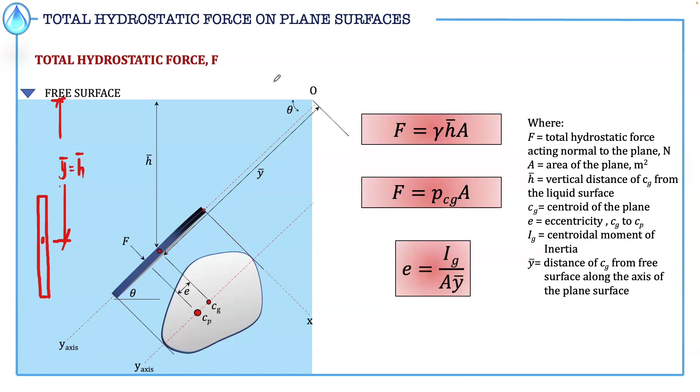Okay, so with that, let's solve sample problems.

Sample problem number 1: A vertical rectangular plate, 1 meter wide and 3 meters high, is submerged in water with its top edge at the water surface. Find the total hydrostatic force acting on one side of the plate and its location from the bottom.

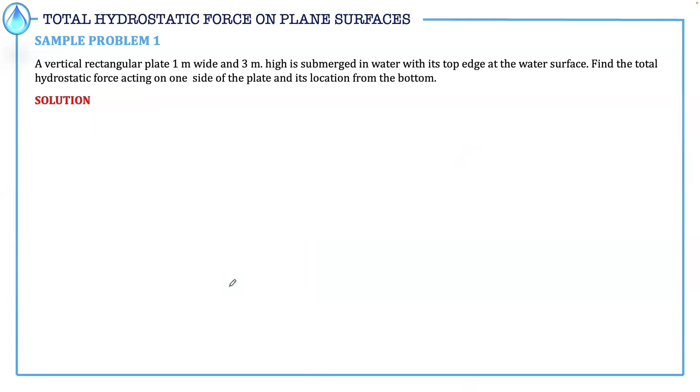From the statement of the problem, we have a plate submerged into water, with a cross-section of 3 meters in height and 1 meter in width. This is the 3D view, and if we draw it in 2 dimensions, this will be the plan view. The liquid surface is located at the top of the submerged rectangular plate, with height 3 meters by 1 meter.

For this plate, let's solve for the hydrostatic force and determine its location from the bottom. Total hydrostatic force is F, and we can use the equation gamma H bar A to compute for the total hydrostatic force.

Gamma is the unit weight of water, which is 9.81 kilonewton per cubic meter. H bar is the location of the center of gravity up to the liquid surface.

The liquid surface is placed at the top of the plate, so H bar will just be equal to half the height of the rectangular plate, which is 1.5 meters. Again, H bar is the distance of center of gravity up to the liquid surface, so CG or H bar equals 1.5 meters, just half of the rectangular plate height.

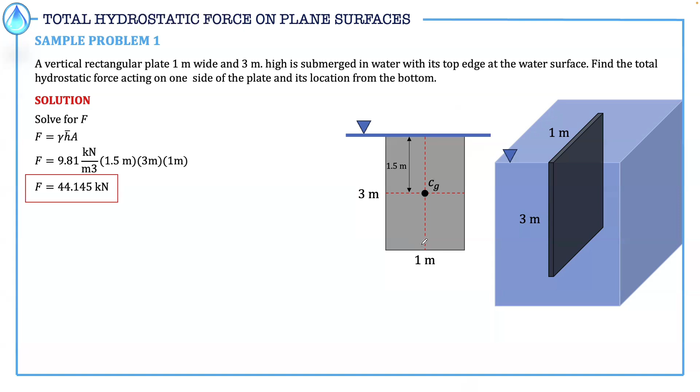Next, let's solve for the location of the hydrostatic force from the bottom of the plate. As discussed earlier, the hydrostatic force directly acts on the center of pressure of the plate, which is located below the center of gravity.

We know its vertical distance, and that distance is always E, the eccentricity. So again, what is being asked is the location of the center of pressure, or where the hydrostatic force hits towards the bottom of the plate. Let's call that the X distance.

We can get the relationship that X distance is equal to the total height of the plate minus 1.5 minus the eccentricity. That's directly X. But we don't know E yet, so let's solve for the eccentricity first.

Eccentricity can be calculated using the equation IG over A y bar. IG is the centroidal moment of inertia for the plate. If the plate is rectangular, the centroidal moment of inertia is BH cube over 12. For area, we know it's 3 times 1, base times height. For y bar, since the orientation of the plate is vertical, this will be equivalent to h bar.

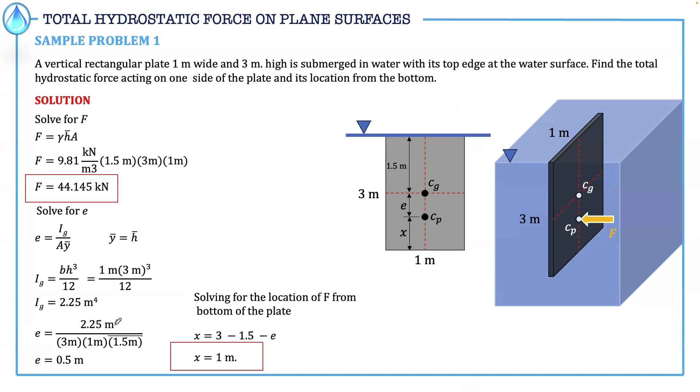Next, let's have sample problem number 2. A vertical triangular surface of height 3.5 meters and horizontal base of 1.5 meters is submerged in oil with its vertex at the liquid surface. Determine the total force F acting on one side and its location from the center of gravity of the gate.

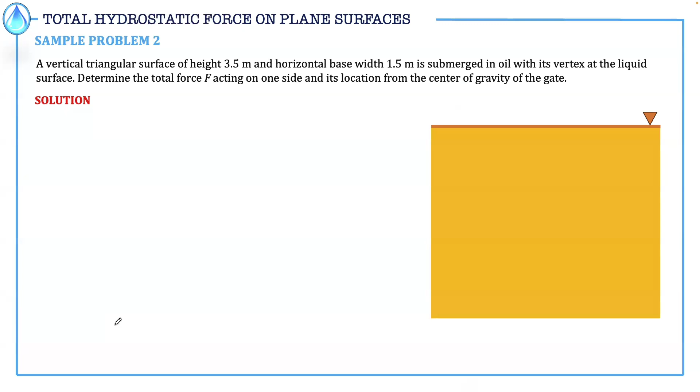So now we have oil as our liquid, and submerged in it is a triangular plate wherein the vertex is located at the top of the liquid surface. It's at the liquid surface. Its height is 3.5 meters, and the width is 1.5 meters. So again, two things are being asked: the hydrostatic force F, and the location from the center of gravity of the gate.

The total hydrostatic force can be computed by the equation gamma H bar A. Gamma would be the unit weight of the liquid in which the gate is submerged—in this case, oil. When the problem states oil as the liquid but doesn't give the specific gravity, we will use the default SG for oil, which is 0.8.

Yan, 0.8. Next, H bar location, or the vertical distance from the center of gravity up to the liquid surface. If triangular ang cross-section natin, 2/3 lang ito ng height papunta sa vertex. Pero kung pupunta siya sa base, 1/3 ng height yon.

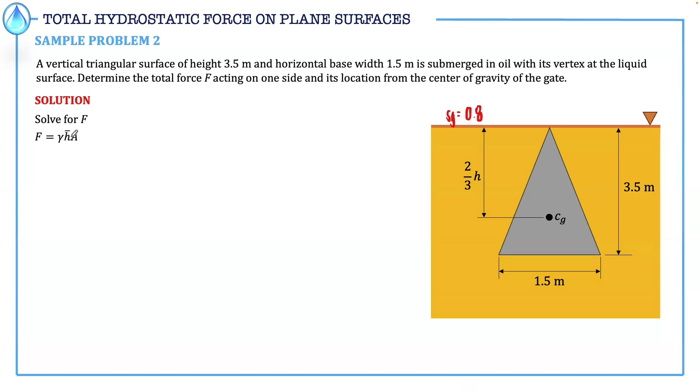So for this orientation, vertical distance for H bar, CG to the liquid surface, ay 2/3 ng height, wherein height is 3.5 meters. Area ng triangle ay 1/2 base times height. Let's substitute: unit weight, 9.81 times 0.8 kilonewton per cubic meter, times 2/3 ng height 3.5 meters. Area, 1/2 times 1.5 times 3.5.

So let's simplify. F is equal to 48.069 kilonewton. The cubic meter in the unit will be cancelled, matitira na lang yung kilonewton.

Next, let's solve the location of the total hydrostatic force from the center of gravity. Acting yung force F sa CP, and ang CP ay makikita at E distance below the center of gravity. So hinahanap natin yung location ng hydrostatic force from the center of gravity, meaning it's just E, the eccentricity. So solve natin ang eccentricity.

Eccentricity is IG over A times Y bar. Since vertical naman yung triangular gate natin, Y bar will be equivalent to H bar. For the centroidal moment of inertia ng triangle, ang centroidal moment of inertia natin ay BH cube over 36. Base will be the horizontal dimension, and yung H naman yung nakatayong dimension natin, height of the triangle.

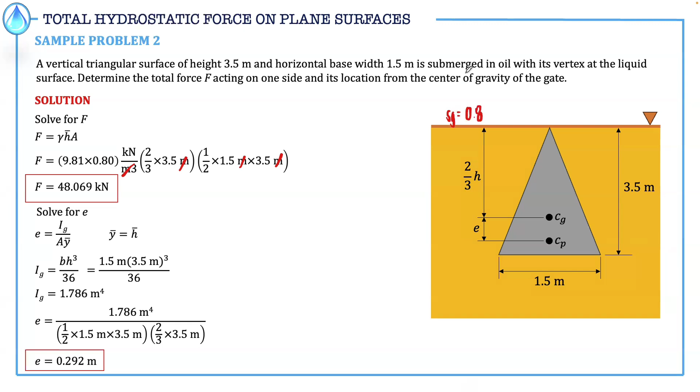Okay, so yung circular gate natin na 10 meter ang height ay submerged sa dalawang liquid, equally separated sila. Bale, this will be the location kung saan yung parang interface ng liquid natin, na oil and water. So unang tinatanong is the total hydrostatic force.

And so yung plate ay submerged sa dalawang liquid. So itong dalawang liquid na to will exert hydrostatic force, tag-isa sila. May hydrostatic force due to oil and meron namang due to water. So we have to compute for each, and para makuha yung total ay i-add lang natin silang dalawa.

So to compute for the total hydrostatic force for each liquid, we can use the equation PCG times area. Try naman natin gumamit ng other equation para sa pagkuha ng hydrostatic force. Due sa pressure naman, kunin natin yung pressure up to the center of gravity nung surface na subjected or submerged sa liquid. Kunin muna natin yung sa oil.

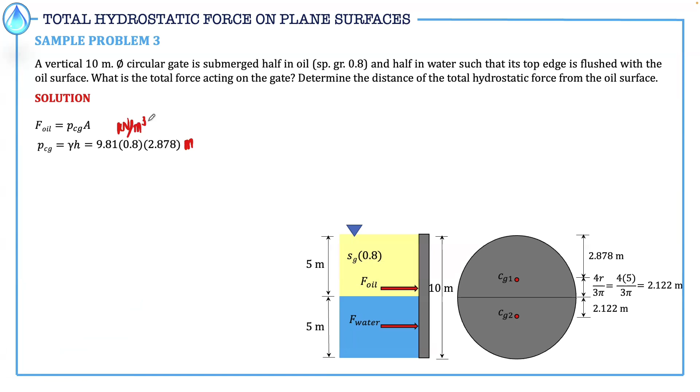Kuha na tayo ng pressure at the center of gravity sa oil. We have unit weight ng oil times H, kung saan H ay distance ng center of gravity papuntang liquid surface. Substitute natin: 9.81 times 0.8 times 2.878. Kaya magiging unit ng pressure natin dito would be kilonewton per square meter or kilopascal, kasi naka-kilonewton per cubic meter yung unit weight, tapos yung height naman ay meter, so magka-cancel lang yung isang meter. So magiging squared: kilonewton per square meter or kilopascal. Simplify, we have 22.586 kilopascal.

Pwede na natin substitute for oil: 22.586 kilopascal. Ano yung area? Area to kung saan submerge yung gate natin sa liquid na oil, yung half circle. Ang area ng half circle ay pi r squared over 2, kung saan r ay 5 meters.

Simplify, total hydrostatic force sa oil ay equivalent sa 886.951 kilonewton. Paano namin naging kilonewton? Ang unit natin ng pressure ay kilonewton per square meter, tapos ang unit naman natin ng area ay square meter. Cancel lang yung square meter, kilonewton ang matitira. So check na tayo dito sa hydrostatic force sa oil.

Water naman ang kunin natin. Gamitin pa rin natin yung same equation: pressure at the center of gravity times area. So we have to compute for the pressure at the center of gravity, nandito yon CG2, from the liquid surface pa rin. And then multiply sa cross-section kung saan submerged siya sa water.

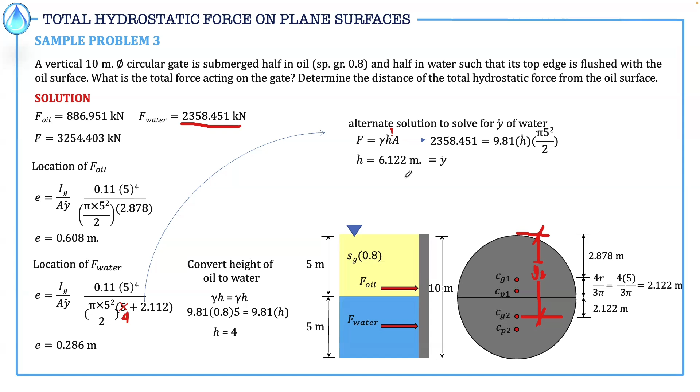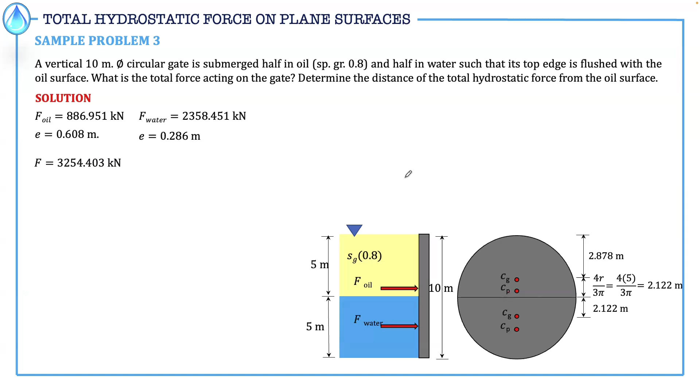After solving the eccentricities, let's get the distance of the resultant or total hydrostatic force up to the oil surface. Let's zoom in on this figure and clarify the locations of the eccentricity or distances of eccentricity for the location of the forces.

From the center of gravity to the center of pressure, the distance for oil is 0.608. This is the center of gravity in water, and this is the center of pressure. Their distance is 0.286 meters.

So our assumption is that the total hydrostatic force, 3,254.403, is located between oil and water. Its distance from the top is x distance. We will take moments toward the oil to find this x distance, coming from Varignon's theorem or concept in our statics.

So let's take moments of these toward the top. Fx equals the moment of F oil toward the top: F oil times 0.608 plus 2.878, plus the moment from the water: F water times total height, 0.286 plus 2.122 - that's at the interface going to oil - plus the total height to the top, which is 5 meters. So plus 5. Let's substitute F.

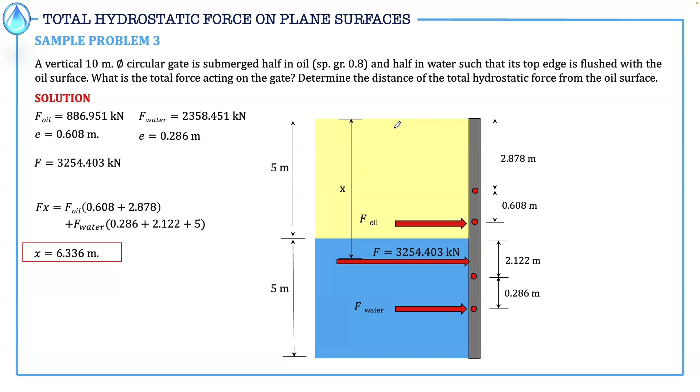When considering more than one liquid, we have to consider the vertical heights or the pressure given by the other liquids. You can't directly get the hydrostatic force using only the pressure at the center of gravity times area. If there are two liquids, you need to consider the other liquid for the pressure - you must sum gamma H. Then, to get the resultant force location, you can use Varignon's theorem.

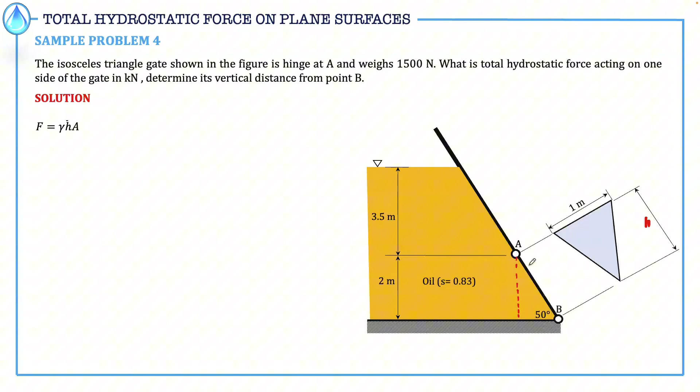This is our h. If this is 2 meters and we have an angle here of 50 degrees, we can use the sine function to get h. Sine 50 equals 2 over h. Solving for h equals 2 over sine 50, or 2.611 meters.

Once we get h, we can locate the center of gravity, which is at 1/3 from the base. So simplifying, 1/3 times 2.611 gives us 0.870 meters.

Next let's get the vertical distance of the center of gravity toward the liquid surface. Let's make a way to get that: it's 3.5 meters plus the vertical component of 0.870, looking at this small triangle. Let's call this y.

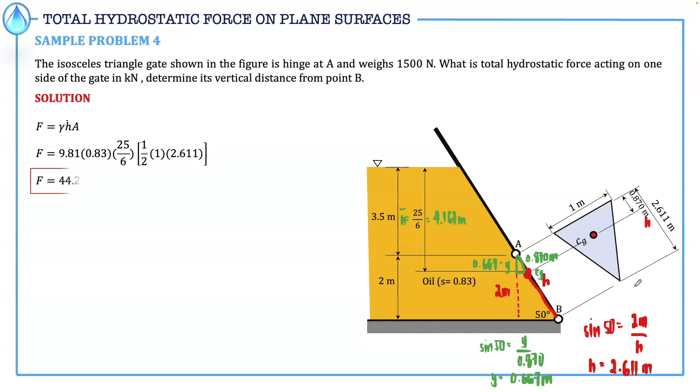Kaya gamit yung mga relationship ng triangles sa figure natin. Yung A naman ay area ng gate, area ng triangle, 1/2 base times height. Yung base ay 1 meter, yung height naman yung 2.611. Substitute and then simplify. Force F is equal to 44.288 kilonewton.

Next, kunin naman natin ang vertical distance ng location ng force F papuntang point B. Si force F ay makikita at E distance from the center of gravity. Kunin natin ang eccentricity. Equation natin ay IG over A y bar. So IG, that is the centroidal moment of inertia ng triangle.

So BH cube over 36. And then A, area ng triangle na 1/2 base times height. Ano naman yung y bar? Para sa y bar, ang y bar ay distance ng center of gravity papuntang liquid surface, but that should be along the axis of the plane. So imbes na vertical, kailangan ay yung nakaparallel sa kanyang inclination. So ito si y bar. Paano natin ngayon kukunin si y bar?

Di ba may h bar ka? Si h bar up to cg yan. May inclination ka naman nito eh, 50 degrees pa rin. So gamit ka lang ng sine function para makuha si y bar. Sine 50 is equal to opposite na h bar over hypotenuse na y bar. Si h bar ay 25/6. Substitute lang natin, and then simplify. Y bar is equivalent to 5.439 meters.

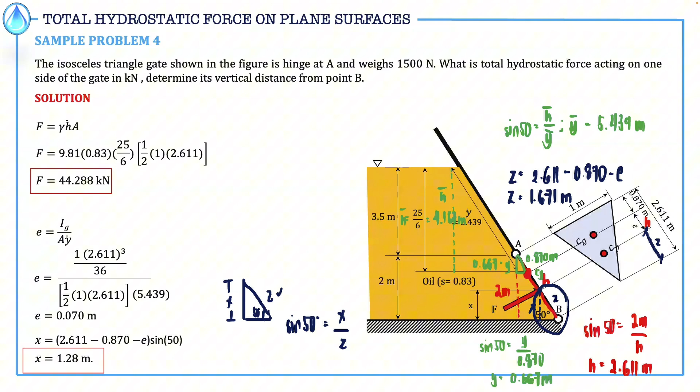Last sample problem. The gate shown in the figure is hinged at A and rests on the smooth floor at B. The gate is 3 meters square and oil having a specific gravity of 0.82 stands to a height of 1.5 meter above the hinge A. The air above the oil surface is under a pressure of 7 kilopascal. So if the gate weighs 5 kilonewton, determine the vertical force P required to open it.

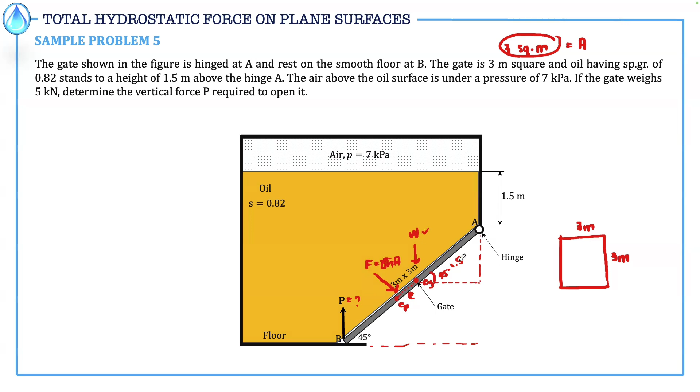Cosine 45, 3 meters. Ayan. Si weight W, o ganun din, kunin mo yung vertical, yung horizontal na distance niya papuntang A. Bale, 1.5 meters. Tapos cosine 45 din. So, ganun yung magiging approach natin.

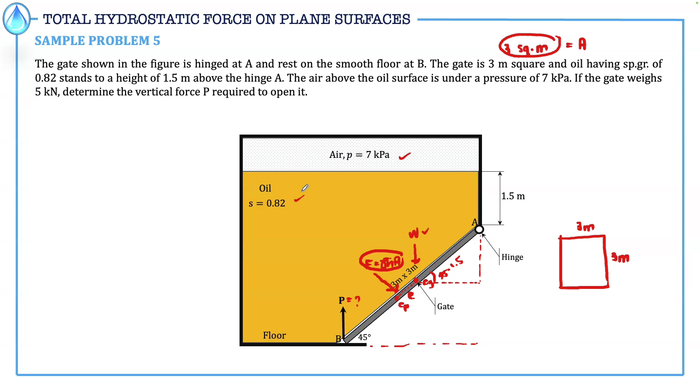And wag kalimutan, no, pagdating dito sa hydrostatic na force equation natin, we have to consider the air pressure. Para tayong merong dalawang fluid na present, air tsaka oil. So, let's solve this sample problem.

So, una nating ilalagay si weight. Nasa center of gravity siya, at 1.5 meter from point A. So si hydrostatic force, ito yung dinrawing natin kanina. I-align lang natin.

So, let's solve for the hydrostatic force. Since two fluid yung present, mas okay na gamitin natin yung pressure at the center of gravity times area na equation for the hydrostatic force. So, para sa pressure at the center of gravity, we will use summation ng pressure, so pressure sa air plus pressure due to oil.

So, ang pressure due to oil, pwede natin makuha gamit yung equation na unit weight times H. Yung H ay vertical distance ng center of gravity papunta doon sa kanyang liquid surface. So, pressure due to air, yun yung 7 kilopascal.

So, confirm lang tayo ng mga distances para sa H. Di ba ito ay 1.5 meters, tapos ang inclination niya ay 45 degree from the horizontal. So if we want to get the vertical distance of center of gravity up to point A, that is equivalent to 1.5 sine ng 45 degrees, gamit ka lang ng sine function. So may overall height na tayo na 1.5 plus 1.5 sine 45.

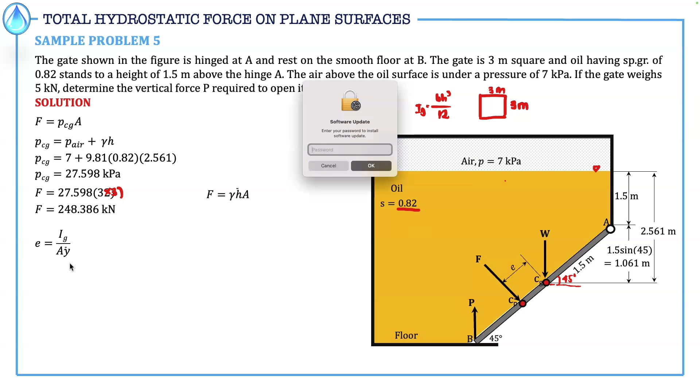Sige, kung gawin natin F is equal to gamma H bar A para makuha si H bar. Hindi yata mag-work yung mag-convert ng gamma H equal to gamma H, dahil wala tayong unit weight ng air eh, tsaka height ng air. Pero let's check nga if, halimbawa, 7 kilopascal to, tapos gamma H. Yung gamma mo na ilalagay is for oil. Ayan, if pareho yung makukuha dito sa H bar.

Okay, wait lang. 9.81 times 0.82 tapos H. So equivalent height ito nung air papuntang oil. So height ng air to oil yan, yung H dyan. So solve natin, 7 divided by 9.81 times 0.82. We have 0.870 meter. Then, kung H bar ang gustong makuha, so 0.87 plus yung height ng oil naman na 2.561.

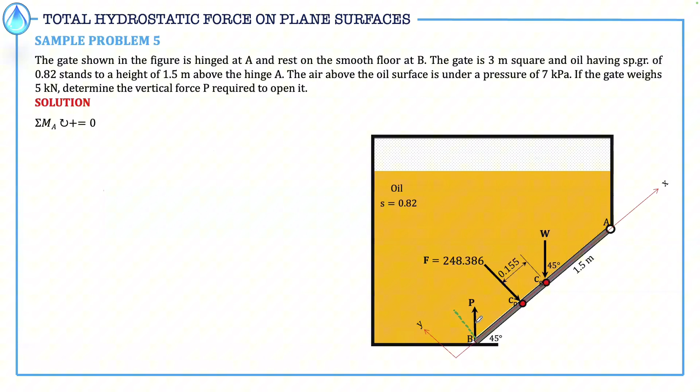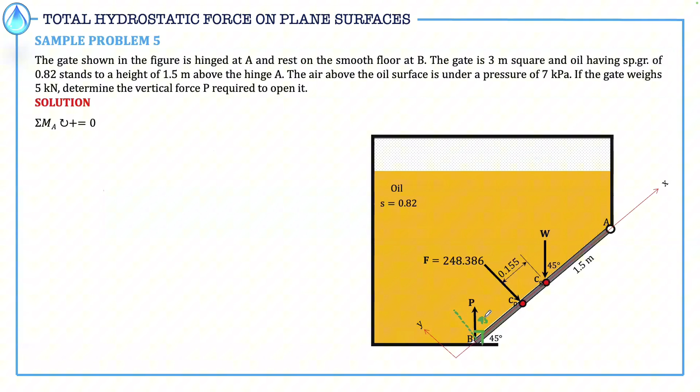If force P is perpendicular to the horizontal axis which is given as 45 degrees to the gate, the remaining angle is 45. Then if we get the component of P perpendicular to the axis now, the remaining angle between them is also 45 degrees, since it's also perpendicular.

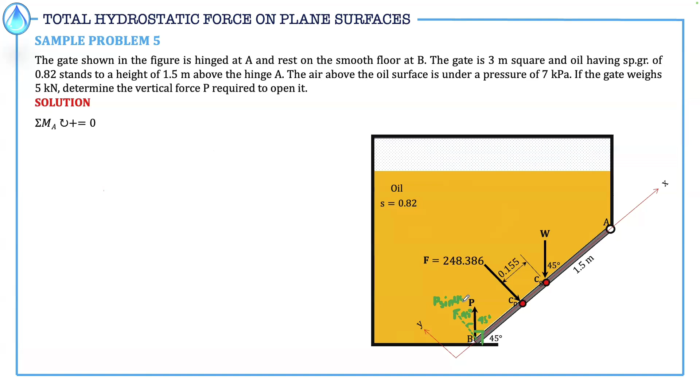Next, for W — to get its component perpendicular to our gate axis, this is the angle we'll use, also 45 degrees with the gate. So to get W perpendicular, we also use the sine function: W sine 45, 45 degrees.

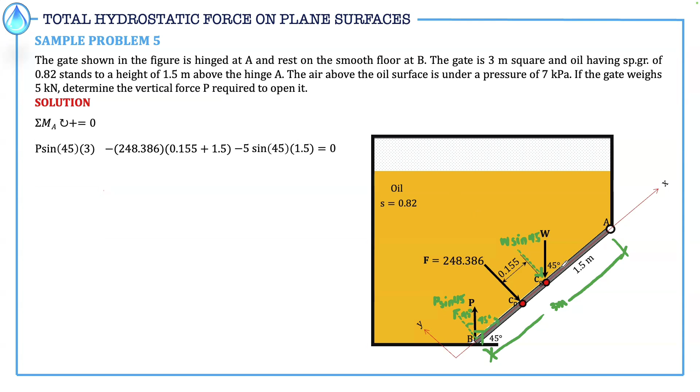And that's it for the total hydrostatic force on plane surfaces. So if you have any questions, just message me in my account.